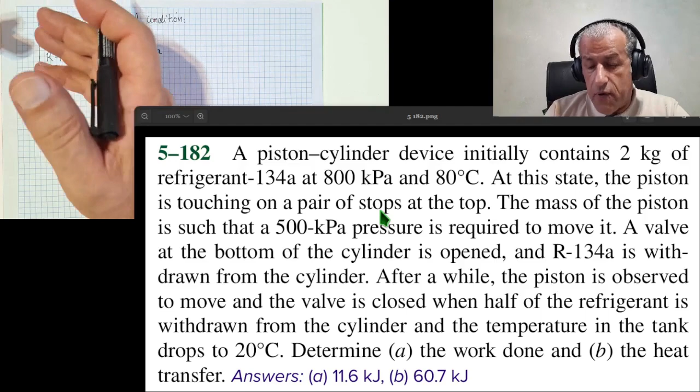It tells us that at this state, the piston is touching on a pair of stops at the top. Assume that there are a pair of stops at the top, and the piston can't go any higher. So if it is pushing, it means the pressure of 800 kilopascals inside the cylinder piston device is more than just required for the piston to float over the R134A, and R134A has higher pressure than the piston weight and atmosphere would produce, and therefore is pushing at the top with this pressure.

The mass of the piston is such that a 500 kilopascal pressure is required to move it. So if the pressure is reduced to 500 kilopascals, the piston would start moving down. So the pressure at the top is P equals 500 kilopascal, and the pressure underneath is 800 kilopascal to begin with.

But let's see what happens next. It says a valve at the bottom of the cylinder is opened and R134A is withdrawn from the cylinder. So there's a valve underneath, and it's opened, letting R134A out.

Now, so what we expect is that the pressure would reduce and eventually reach 500 kilopascal, and by that time there would be an equilibrium pressure between the pressure inside R134A and outside. After a while, when the pressure inside is 500 kilopascal, if we let more R134A out, then the piston would move down.

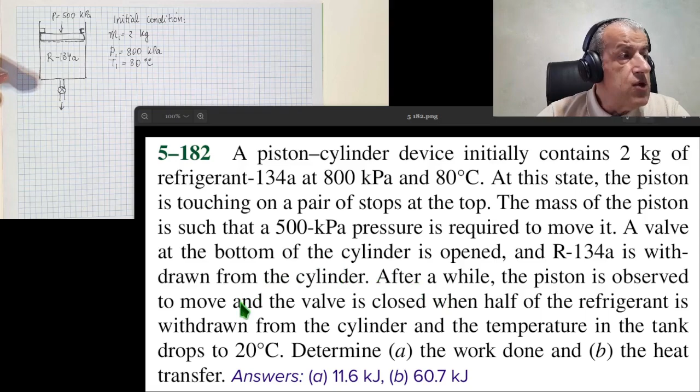Now it says after a while, which is the time when the pressure inside is between 800 kilopascal and 500 kilopascal, the piston is observed to move. So the piston would start moving.

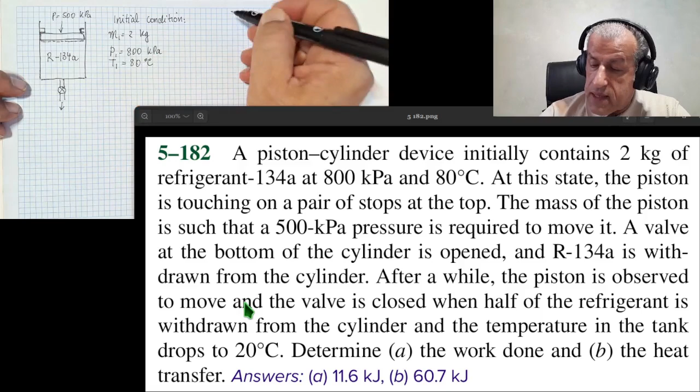So there is initial condition one, there is the intermediate condition, let's call it intermediate, and what that is: when V2 equals V1, P2 equals 500 kilopascal.

Okay, P2 equals 500 kilopascal, and just after this time, the piston will start moving down. So after a while, which is between condition 1 and condition 2, the pressure is dropping between 800 and 500. It says after a while, the piston is observed to move, and the valve is closed when half of the refrigerant is withdrawn from the cylinder.

So at the final condition, let's call this final, what happens? P3 equals P2 equals 500 kilopascal, because however much mass we let out of the valve, the piston would move down and keep the pressure at 500 kilopascal. So the pressure would remain constant between points 2 and 3. And it says that at point 3, M3 equals half M1.

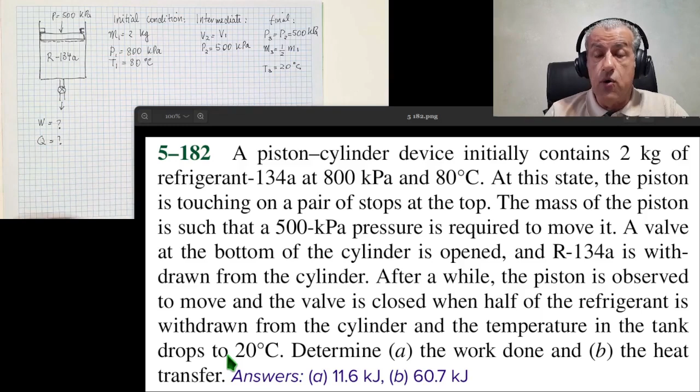Now, if we solve the problem and reach the answers that you see, that would be very easy. And what we shall do is solve the problem between points 1 and 3. Now, if we wish to consider point 2, you will learn quite a lot of information, and you would see how different our answers would be. Therefore, these answers could easily change if you consider point 2.

But a simple look at the tables for R134A would tell us that T critical is 374.2 Kelvin, which is very close to the range we have. So between 20 and 80 degrees C, it would be 293.15, and this would be 353 kelvins. The critical point is just above this, or our process happens just below the critical point.

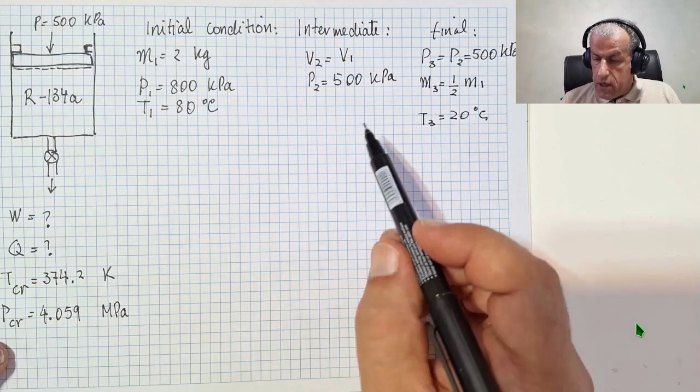But the P critical, the critical pressure, is 4.059 megapascal. Looking at 800 kilopascal and 500 kilopascal and comparing with this value, the temperature is almost the same as the critical point, but the pressure is about 1/8 of the critical point's pressure. Therefore we could well assume that we are in superheat condition for R134A.

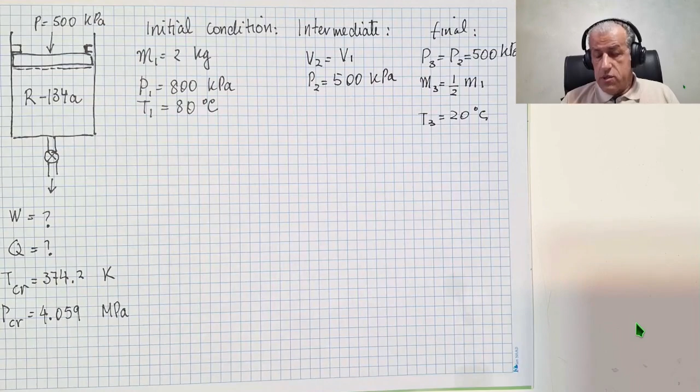Let's have a look at it in the table to see what that tells us. The table tells us that at P equals 0.8 megapascal, which is 800 kilopascal, the saturation temperature is 31.31 degrees C. So at 80 degrees C, we are well in the superheat region, and for 80 degrees C we have quite a number of properties which we could write down.

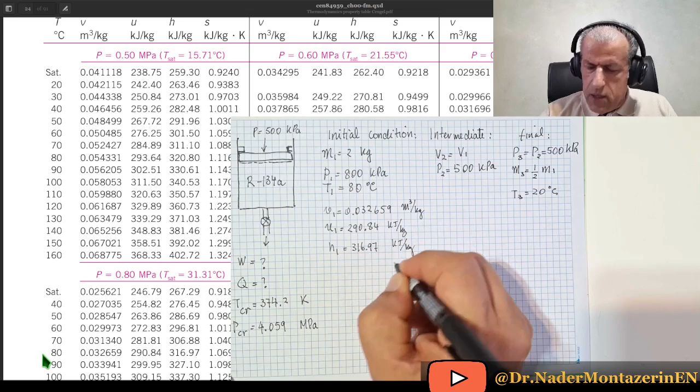So V1 would equal 0.032659, and U1 would equal 290.84. This is kilojoule per kilogram, and that is cubic meters per kilogram. And H1 equals 316.97 kilojoule per kilogram. We're solving this problem within the limits of the first law, so we won't need any information on entropy.

Just above this place in the table where we just read properties for point 1, we have our point for point 3. At 20 degrees C, which is the temperature for 500 kilopascal, we would have this information. It tells us that at 500 kilopascal and 20 degrees C, there is still superheat, and the properties are as follows.

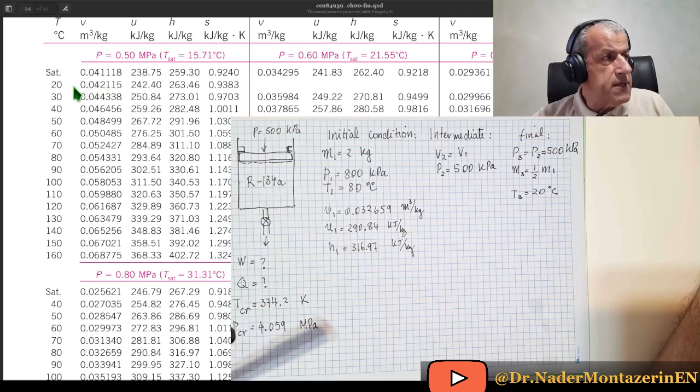V3 equals 0.042115 cubic meters per kilogram, and U3 equals 242.40 kilojoule per kilogram, and H3 equals 263.46 kilojoule per kilogram. So basically, we have all the required knowledge for points 1 and 3.

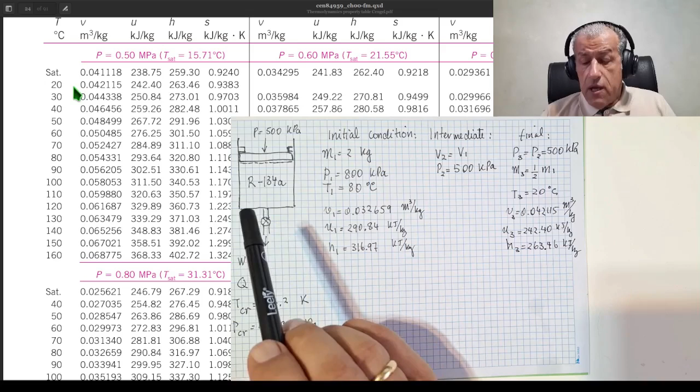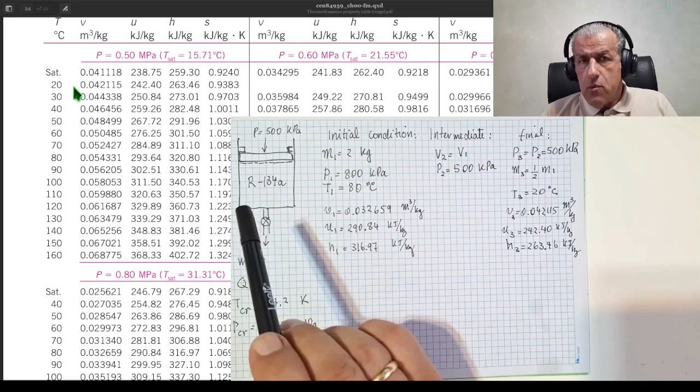And we know the initial condition, we know the final condition, and about the process, we vaguely know what happens because we know that you open the valve, there could be heat transfer, there's certainly work after the piston has started moving, but how their combination works, we don't know.

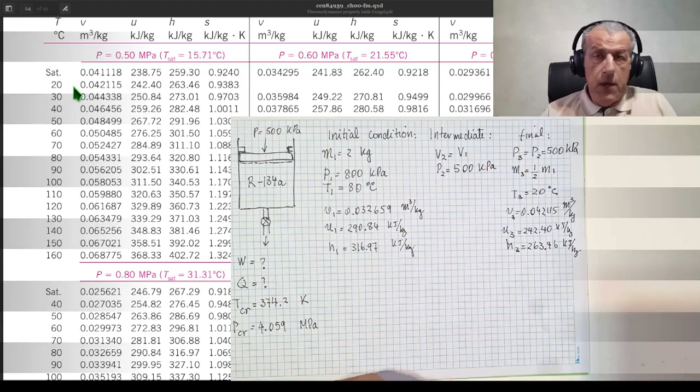But as we know the properties, we could easily go to equations and see how they simplify. Now we have all properties for initial and final condition. Let's simplify the governing equations to see how they would look for this problem.

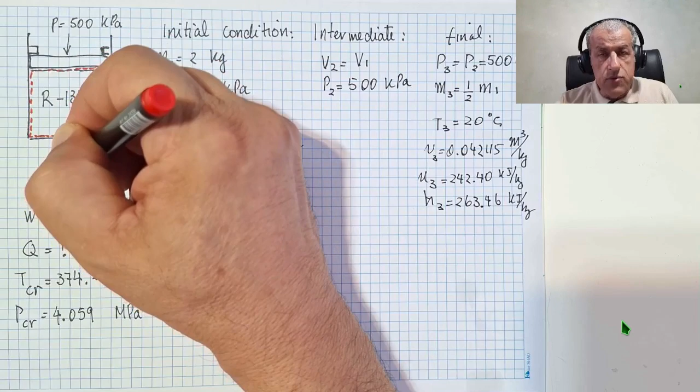What I would do first, and that's important, is to select the boundary you want to study. The boundary, the control volume, is the R134A, so long as it stays inside our cylinder piston device. If it leaves our boundary, our cylinder, then it won't be inside our boundary. So we have a control volume inside our cylinder piston, and we want to simplify the governing equations for this very boundary.

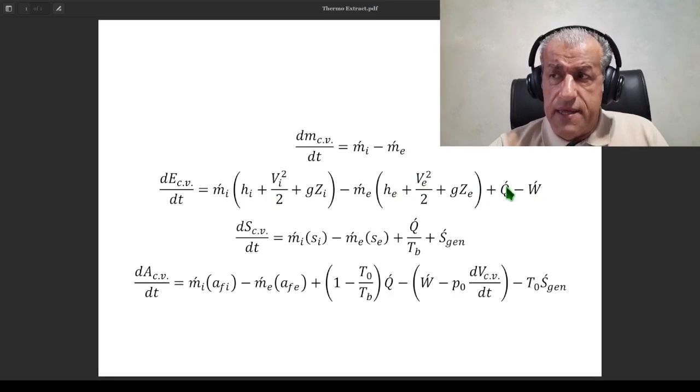So velocity change and elevation change would vanish from equations. There is no mass going into our cylinder piston device. So this term m dot i and this term, the energy with incoming mass would vanish, but this term is there, and these two terms are also present.

Now, simplifying the first equation, the mass conservation equation would tell us that M3 minus M1 equals no mass enters, but mass leaves, so it is ME, and we are integrating this equation between initial and final conditions. And for the energy equation, it is M3 U3 minus M1 U1, which is the difference between initial and final energies, would equal no mass enters, but it is the mass that leaves, ME.

HE, and between 1 and 3, both heat transfer and work are present. Of course, heat transfer is present throughout 1 to 3. Work is only present between 2 and 3 while the piston moves, but we have to take it into account once we are integrating everything between 1 and 3.

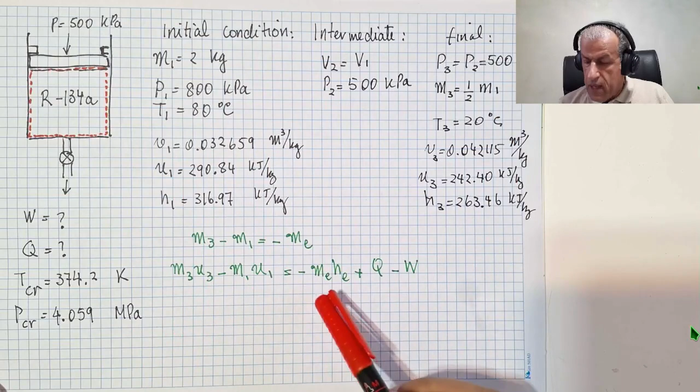Well, in this equation, properties of points 3 and 1 are known. We have everything. Here we have masses and energies. The mass that is leaving the control volume could easily be calculated. Initially, there is 2 kilograms, and half of it leaves, so 1 kilogram is left, and 1 kilogram remains in the cylinder. HE we should assume to be the average between H1 and H3, so the average value should be taken.

Q we don't know, and W is easy to calculate since it's a constant pressure process, and we only need the integral P dV, and with constant P, it makes it P times V3 minus V1. So the only unknown in this equation perhaps is Q, and we shall calculate it right now.

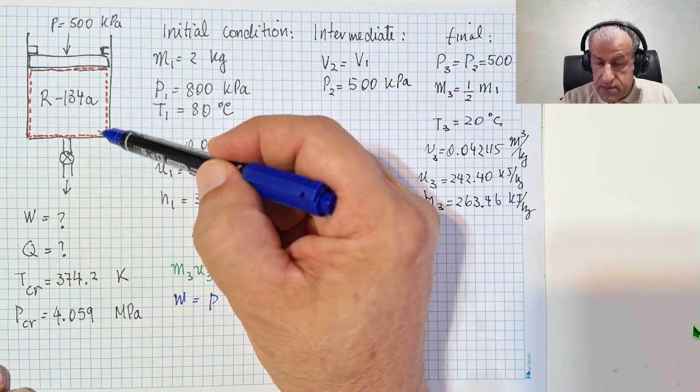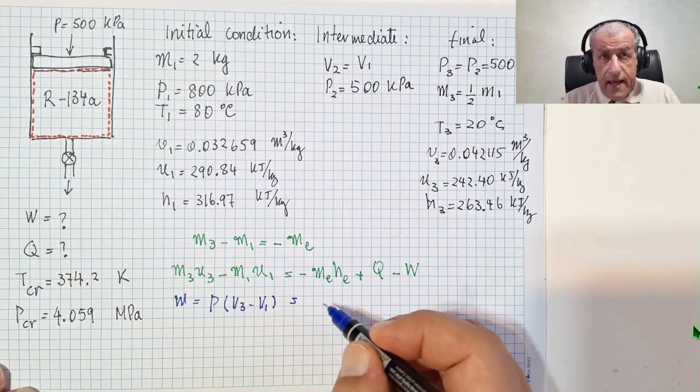So W equals P, the pressure, and when the piston starts moving down, this is a constant pressure process, P times V3 minus V1, and that equals P times M3 V3 minus M1 V1, and that equals 500 kilopascal times M3, which is 1 kilogram, times V3. We know the value, it is 0.042115, and minus M1, which is 2 kilogram, times V1, which is 0.032659.

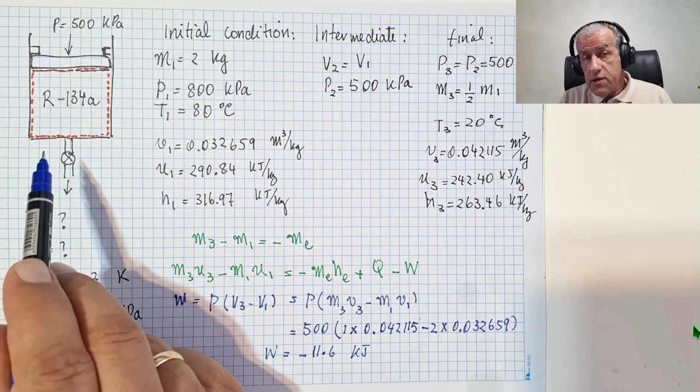And the outcome for W would be minus 11.6 kilojoule. Please note that W is minus, and the minus sign should be there, since work is done on R134A. The environment is doing work on R134A, and the piston is moving down. So the work should be negative, and that's the sign we have here.

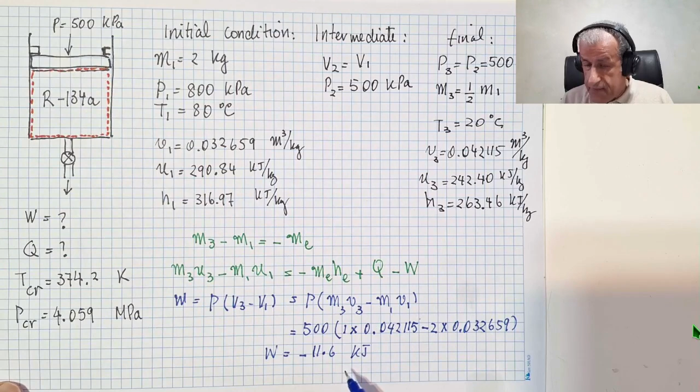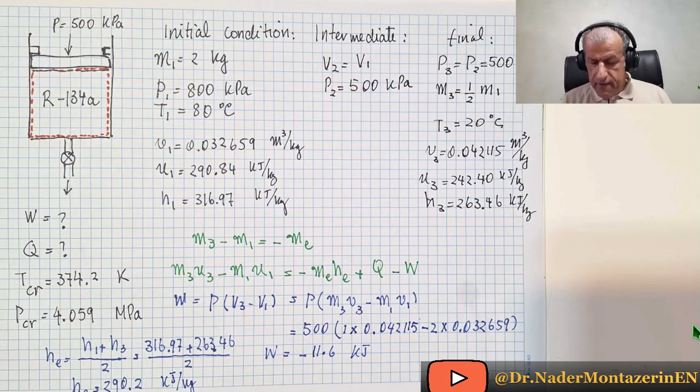Also, a very simple other point that we have to calculate before we start is that HE equals H1 plus H3 divided by 2, and that would be 316.97 plus H3, which is 263.46, divided by 2, and therefore HE would be 290.2 kilojoule per kilogram. Now you see we have everything we require for solving this equation and calculating Q.

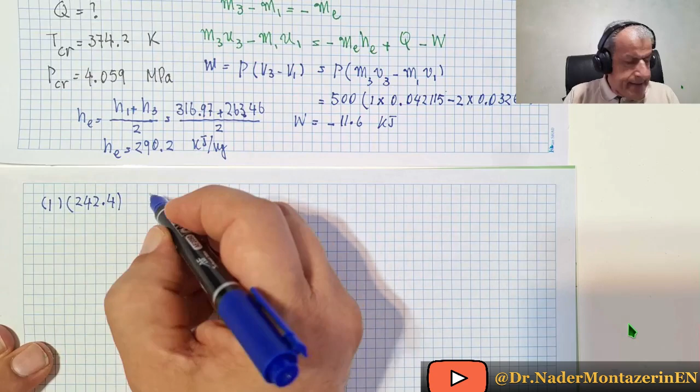Finally, putting numbers to this equation would be M3, which is 1 kilogram, times U3, which is 242.4, minus M1, which was 2 kilograms, and U1, which was 290.84, and that equals ME, the mass that has left the control volume, minus 1, times HE, which is the average enthalpy, and that is 290.2.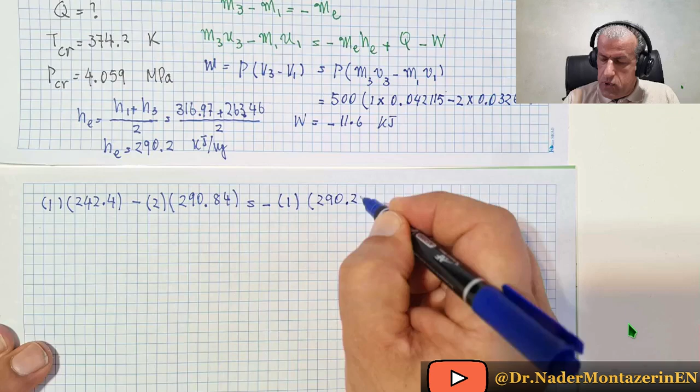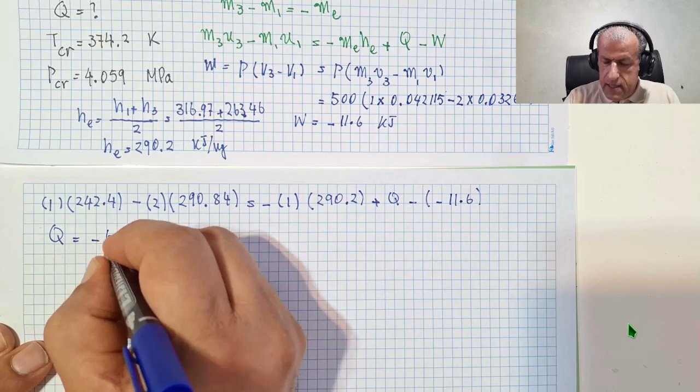Plus Q, minus W, which is minus 11.6. And the outcome for Q would be minus 60.7 kilojoules. This is also a negative value, since heat is leaving our control volume.

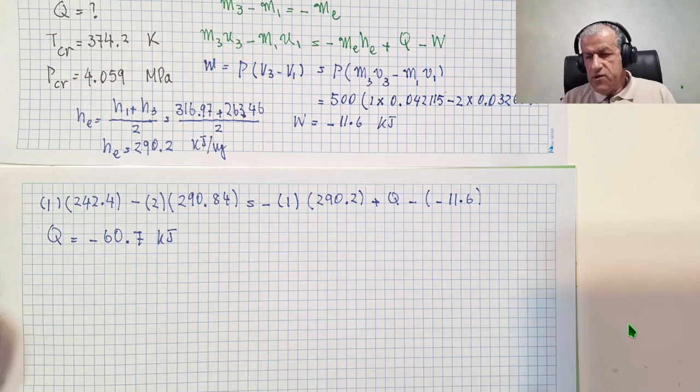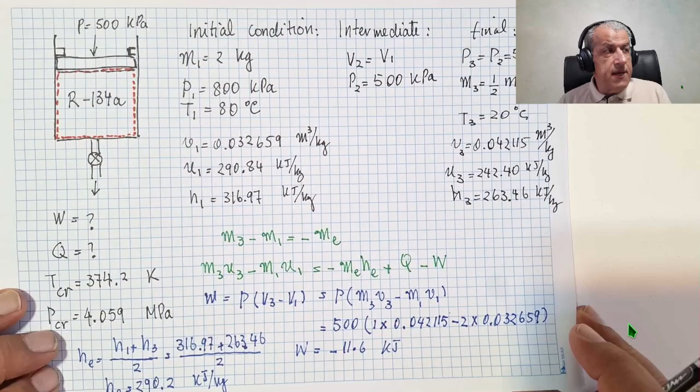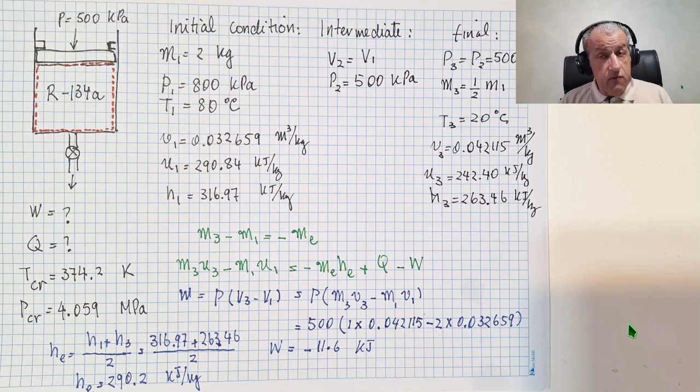Well, these are the two answers that the original problem had asked from us, and the calculation was pretty simple and straightforward. There looked no problems, but there's a very important problem which shows itself if we try to calculate where point 2 could be. I mean, there is a point 2 in between, which we haven't looked at. And if we look at where point 2 is, then we would learn very interesting points that would basically change our calculation for Q and give us very different values.